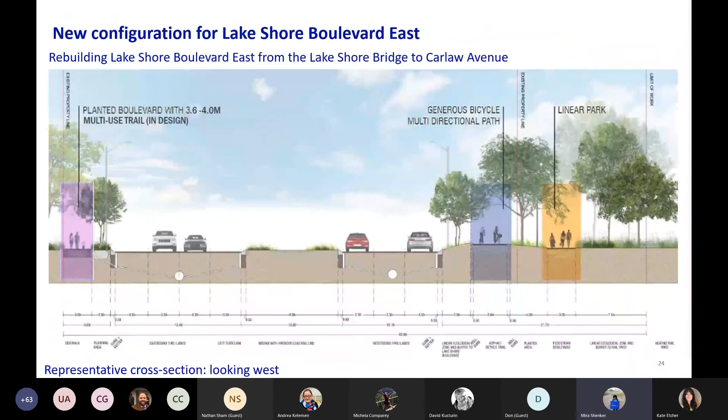The reason we're not focusing too much on that here is because, as you probably realize, there's a lot of content related to the construction, staging, and detours for the Lake Shore Boulevard East work. But in past meetings, we have gone into detail about how this works and why we need to do it.

You can see there's a bit of context here for where it is. Lake Shore Boulevard is the east-west road there, and then you've got the swoop up to the DVP, and Don Roadway is that north-south street. You can see the Don River, the existing Don River, and it flows into the Keating Channel here, coming down south and flowing west out into Lake Ontario via the Keating Channel. In the graphic beside it, which is the design drawing for how this area will look when the sediment and debris management area is complete, you can see that the Don River at this location is widened.

The sediment and debris management area is directly to the left of that widened Don River. How it works is a longer presentation, but I'll link to the last presentation we made to our stakeholder advisory committee, where we got into more detail around the final design and plans for that area. I'll paste that link into the chat before the meeting ends, and if there's follow-up, we can send more material. Happy to talk about that.

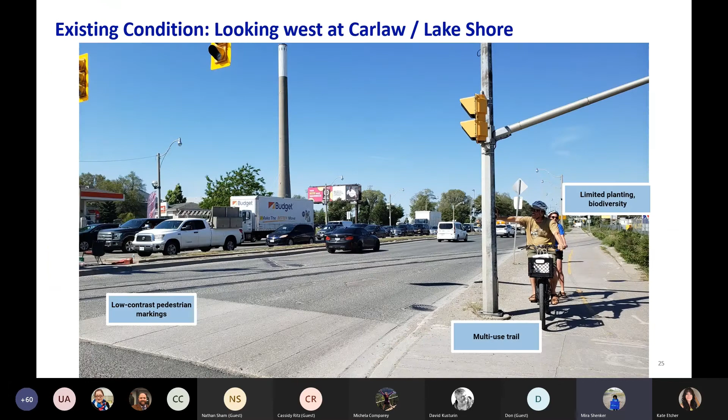If you would like a follow-up or are still unclear about the best route, I think Kate's flipping over to that map to show what I'm describing. There you go—we can certainly elaborate. Please use the chat if you have a follow-up question or it's still not clear how to navigate this.

The next question is: are you pre-alerting Google Maps and Waze to all of these changes? Yes, we will absolutely upload those changes as they're happening and make sure we get that information available to people in as many formats as possible.

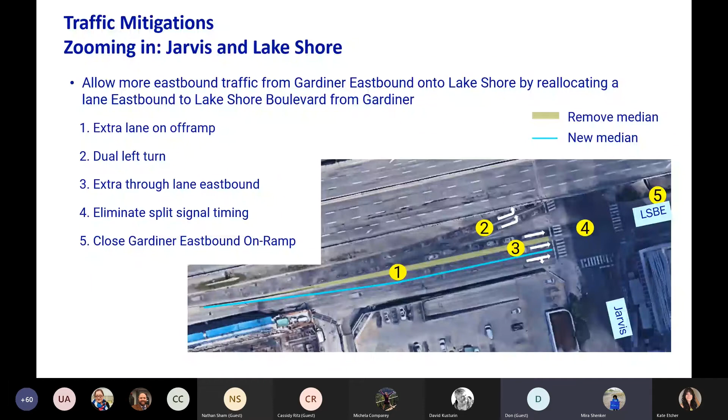Next question: any noise impact information during the removal? We did review that in the presentation. Kate, if you want to flip back to that slide for the benefit of anyone not participating in this meeting who might be watching this recorded Q&A and didn't catch that information.

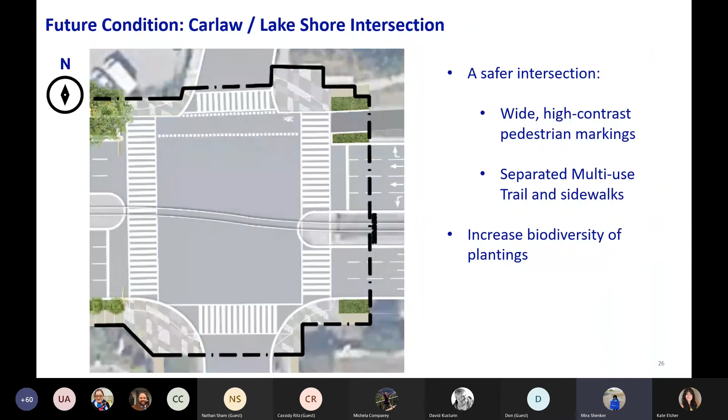On weekends, while the ramp removal is taking place, yes, there will be some noise, but as identified on the graphic Kate is flipping to, the residential areas are relatively far from where those ramps are and where the work would be taking place—certainly significantly further than some residential areas that were nearby to the more recent work on the western portion of the Gardiner.

This is the visual in the presentation you could go back to if you'd like a closer look based on where you live. If you have a specific question after reviewing this, you should absolutely email us and raise your concern so we can get you a more detailed answer.

Next question: what will the impacts of roadwork and traffic mitigation be on the buildings and properties east of Carlaw Avenue? Will driveways be impacted for buildings at the Lakeshore Boulevard East and Leslie Street intersection, or will there be road closures near Lakeshore Boulevard East and Leslie? No, there will be no impacts of that sort east of Carlaw.

Next question, relating to the north side minor intersections between Booth and Carlaw—so Logan, Morse, future East Harbour Streets—what, if any, traffic calming measures will be implemented to prevent southbound-to-westbound autos from rolling through their stop signs and bars into the pedestrian sidewalk and multi-use trail? There's more detail for context: this is a historic issue at these locations, including Booth presently, where drivers coast through the stop looking for gaps in traffic to the left or east, running over cyclists and pedestrians with right-of-way coming from the west.

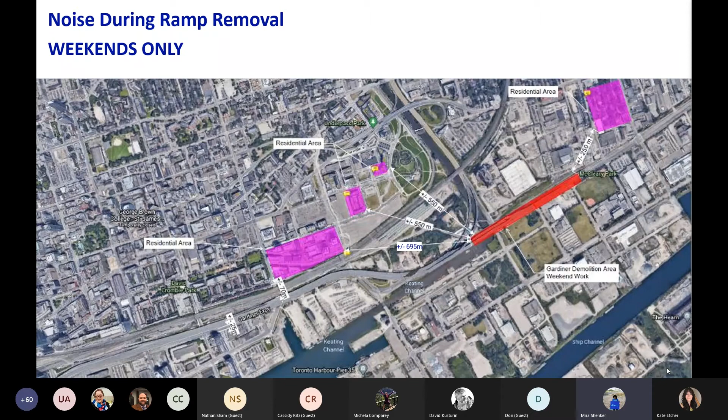My review of the design doesn't indicate any elements which would mitigate this problem. The request is that the pedestrian and multi-use trail crossings of these minor intersections be raised or tabled to make it clear to drivers that these crossings have the right-of-way, and to make it uncomfortable for those who fail to fully stop.

So next question. Is there a long-term view to reduce or create dedicated routes for large truck traffic in the area? There are studies that the city is conducting that look at the broader area in terms of truck movements. I don't know, Cassidy, if you have any insight or updates related to those studies. I don't think you're directly involved, but you may have some more info than I do. Sorry, Mira, I missed the question.

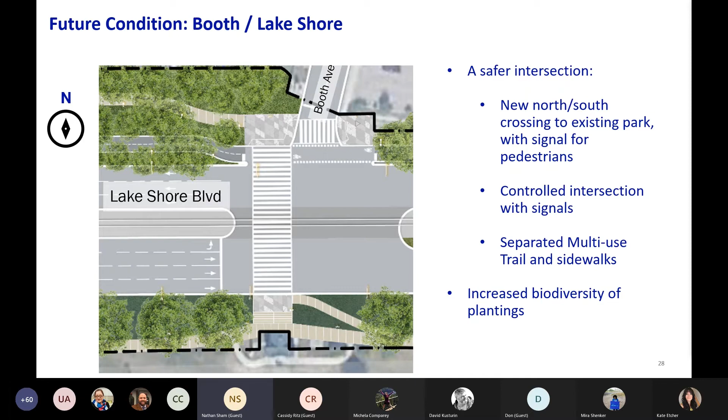So this would be City of Toronto working with Metrolinx to coordinate project implementation and timing. I'd also like to add that traffic will only be rerouted during the weekend for the ramp demolition, so that's 5 consecutive weekends starting September. Right, so it wouldn't impact, yeah. Exactly. During the weekday, the DVP northbound can still be accessed from Don Roadway, and it's still accessible during the Lakeshore reconfiguration project. That's an important clarification, Nathan. Thanks.

Next question, wanting to confirm for a driver getting on the Gardiner westbound from the Carlaw Lakeshore area, Jarvis would be the first on-ramp. For right now, yes, that's correct.

Next question is, what is the timeline for public realm improvements between Jarvis and Cherry? I'm not sure there is a specific timeline established or confirmed yet for that piece of work, unless Nathan, you know otherwise. Sorry, could you repeat that? Yeah, of course, this is the work further west between Jarvis and Cherry on public realm improvements, the Lakeshore Boulevard public realm design that's been approved. I don't have the timeline, I would need to consult with somebody from the Waterfront Toronto team. We'll follow up on that and clarify whether there is a firm timeline associated with that. I don't believe that there is.

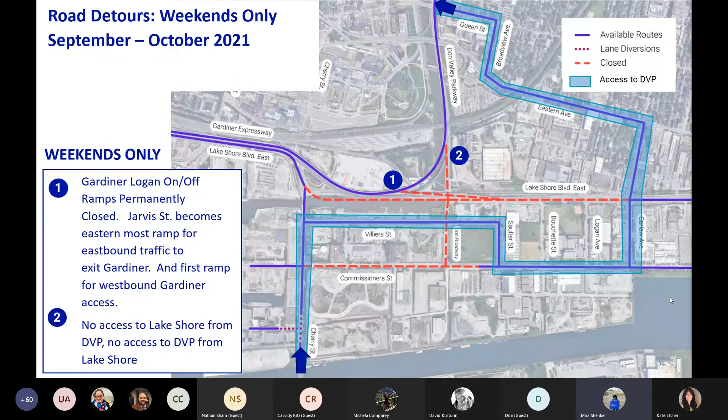Question about the Lake Shore Bridge. Can we confirm or clarify what the future condition will be? Presumably this is the bridge on Lakeshore over the Don River, is that what we're talking about here? And the question is, what will be the future condition? Is the elevated overpass coming down to meet Lakeshore across the river? So we can pull up the diagram again of the reconstructed bridge, if that's helpful. I think the question is, where does it come down? Where do we start to be at grade?

Don, you might be able to clarify what that looks like in the future.

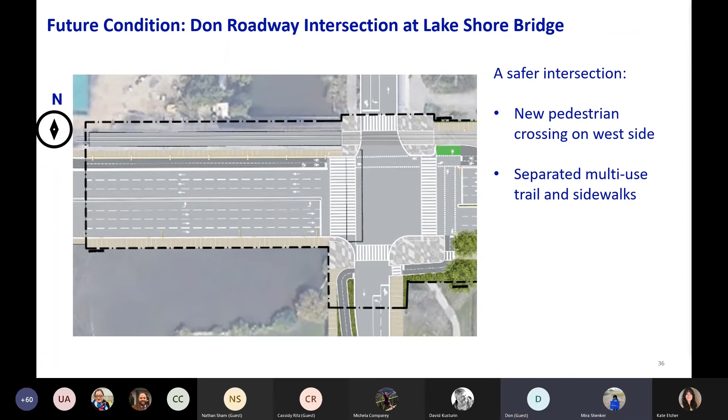So the yellow on the previous slide showing the Logan ramps, they're being removed forever. There will be no access from the Gardiner through this area, and that access will be further west, just to the east of Cherry Street. So effectively the Logan ramps are being moved west, closer to Cherry Street.

Hopefully that's helpful. The question was really about the ramps. My apologies, I was having a bit of a hard time decoding that one, and we've got some other folks in the chat helping me out. Thank you for helping clarify what the question was about, and I think that probably does answer it.

So a follow-up question about getting to the DVP from the Jarvis area. The question is, did you take into consideration that there are going to be a lot more people living in the East Bayfront area, making it incredibly challenging to get to the DVP from their neighborhood?

I think there might be a follow-up question coming in the chat, which is fine. Building on that, the modeling done for the construction period is relatively near term, so out for the next 4 years. There will be some changes, but the much longer term growth would happen after the construction for this project is completed, and any future decision about closing down the Jarvis Street on-ramp would be made in the context of growth happening in the area.

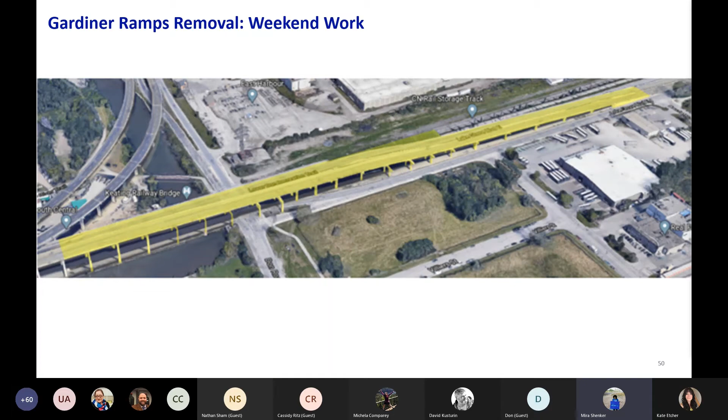So the next question is about the Cherry Street cycle paths. Could we get into more detail about the new paths and timeline for access to those changes? What will the crossing of Cherry Street look like for cyclists continuing east-west? Noting that it went by a little bit fast, which is understandable.

So here are those maps again, and maybe we can quickly review what the situation will be like for cyclists crossing Cherry Street east-west during the various stages. Don, are you able to flip through the different stages with particular attention to that movement? I think we don't have detail showing the cycle improvements along Cherry to show that connection between Villiers and Lakeshore. We don't have a zoomed-in image, no.

But we could follow up with that. Why don't we go ahead and do that. We do have drawings that kind of zoom into the street, though these are obviously too high level to give you a sense of the minutiae of that movement, other than that you can get across as is shown here. So we can certainly, in the summary from the Q&A session, add that visual so that it's super clear what that movement will look like.

And if you have a follow-up question, once you understand a little bit better, you're obviously encouraged to reach out to us and we'll answer it there. Mira and Don, can you hear me? Yep, it's John, John McKee.

I think it's important to note that the full reconstruction of the final condition at Cherry and Lakeshore would be completed in October of this year before that cycle detour is put in place. So I just thought it was important to note that the final condition, which is the upgraded cycling facility, will be in place before the detour is open. And that's part of the planning process for making these detour routes work as best as possible, so showing that drawing of the final design for that intersection and movement will be helpful.

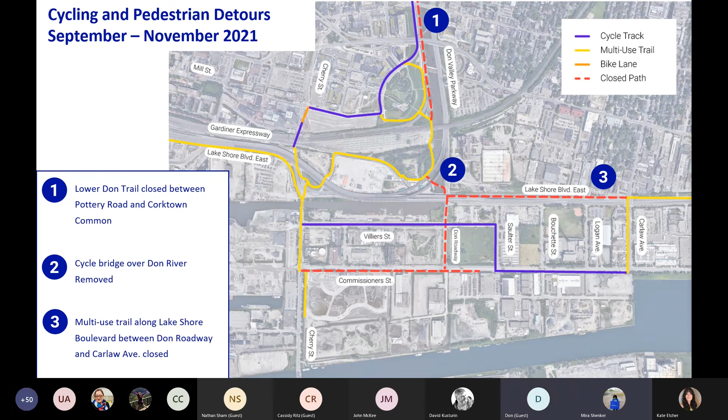Meantime, we do have one graphic, just going back to the previous question, that shows the multi-use trail that Shannon just posted about in the chat, along the west side of Cherry Street. Kate will pull that up quickly, and then maybe, John, you can just walk through what that movement looks like.

While we're working on that, I'll go to the next question to keep us moving, and we'll get that graphic up when we can. So the next question is: when will the Lower Don Trail bridge to and from Lakeshore be replaced? You can actually see on slide 36 what the final condition will be.

That bridge won't be replaced. The cycle crossing will be on the new bridge that's crossing Lakeshore. I'll just finish that quick answer: the plan is, when we widen the Lakeshore Bridge that crosses the Don River, the cycling connections will be made on that new bridge.

There's no specific timing for when that would be open. It's going to be completed in 2025 along with the rest of this work. So looking at this graphic, this just gives you a better sense, going back to the previous question for a moment, of what the bike facilities at the new intersection of Cherry and Lakeshore will look like.

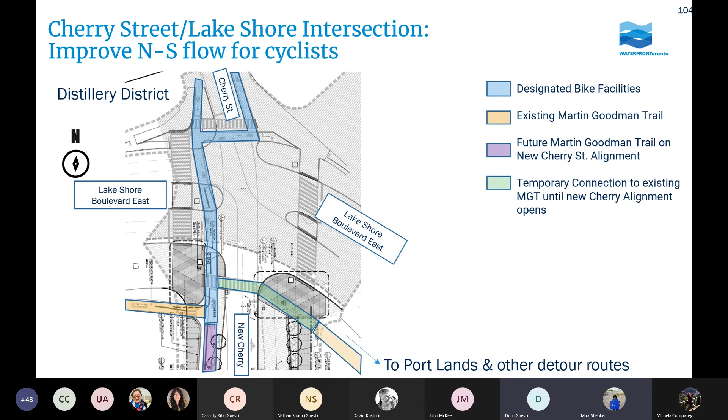Thanks, John. And the follow-up question is: how does that connect with the Northeast track that is currently there? Is that being replaced only on the south side? Sorry, I don't understand the question.

So the Northeast track, the piece going up underneath the rail yards, etc. That will be closed. West of the Cherry, sort of northwest of the Cherry Lakeshore intersection, that trail will be closed, and will be diverted—if you're going north, to Cherry and Mill Street; if you're going east, it'll be through the Portlands for the duration, down Cherry to either Villiers or Commissioners and across.

Thanks, John, and hopefully that did help clarify a little bit. Please continue to post your follow-ups as much as you need for that one. So moving to the next question I have here.

Will the off-ramp from the Gardiner just west of Cherry result in traffic backing onto the Gardiner ramp, possibly creating a safety hazard for cars looking to go north on the DVP? To clarify this question, is this related to the final design with the new Cherry Street ramps? If you can go ahead and clarify that in the chat, just to give us a sense of what this question relates to.

Yes, okay, just making sure I'm correctly understanding the question there. So the new ramps are east of Cherry. I don't know if anyone on the team wants to jump in and provide further clarification. I would say the new ramp design east of Cherry is still ongoing, detailed design is still happening right now, and certainly the design of the ramps, queue lengths, backups, and safety risk concerns are being considered as part of detailed design.

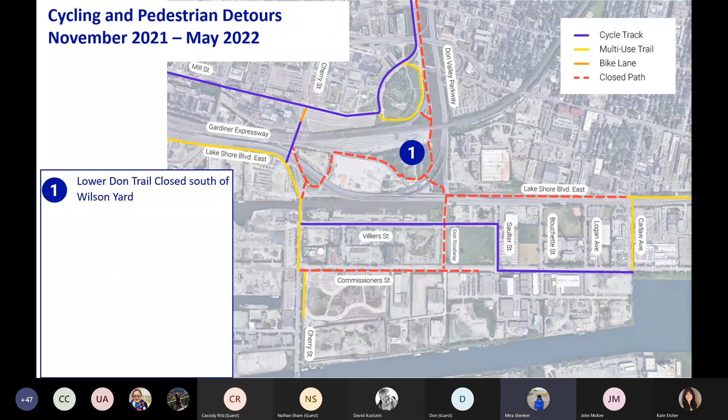What is the red dotted line in slide 22? Are we on slide 22 here? No. That's a good question, I can answer that. John, go ahead.

When we've completed the bridge, the cycle track on the north side, the Lakeshore Boulevard cycling track, will come across Lakeshore Bridge on the west side, and that would be the connection. I believe that's the connection to the Lower Don Trail as it comes in from the north, which will be available. Whether or not it's open will depend on the city, but we have plans to connect the new multi-use trail on the bridge to the trail as it comes down from the north.

Sorry, John, no, the red line is actually the harbor lead. Yeah, the harbor lead line, okay, and it's not red for any particular reason, other than it's currently closed. Chris has suggested that maybe a legend could be added for when this presentation is posted, and I agree, since we caused some confusion there. Thanks to both for the responses, and we'll make a note that when we post this, we should add a little note about what that is.